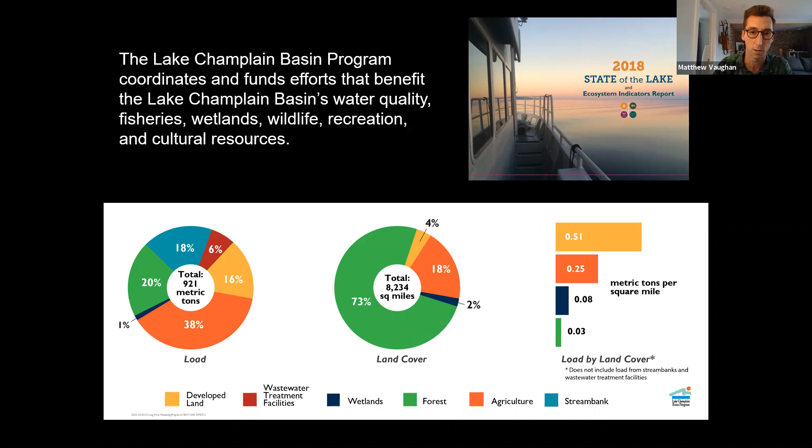I also just wanted to say a few things about how we work. We have a document called Opportunities for Action, which is our management plan, and it's kind of an adaptive management model. This was revised in 2017 and signed by environmental leaders from the 3 jurisdictions we work with. And it identifies strategies like researching ways to improve BMP performance, providing technical assistance for farmers, optimizing fertilizer applications to reduce nutrient load through research and direct farmer support, helping farmers meet clean water regulations through cost-sharing programs, and supporting sustainable ag practices that address these water quality concerns, and also to support phosphorus removal from tile drains and ag ditches. And we'll be talking a lot about that as I go forward in the presentation.

So all of the work you're seeing goes through our active volunteer committees. The Technical Advisory Committee is a group of 25 or so scientists that get together once a month and talk about these issues and help direct the research and implementation of the Lake Champlain Basin Program. And on a higher level, we have a Lake Champlain Steering Committee that awards our grants and helps us identify which partners we're going to work with and what we're going to be focusing on. So again, for the talk today, I'm going to highlight some of our recent work and ongoing work and try to highlight the most important takeaways for you to leave with.

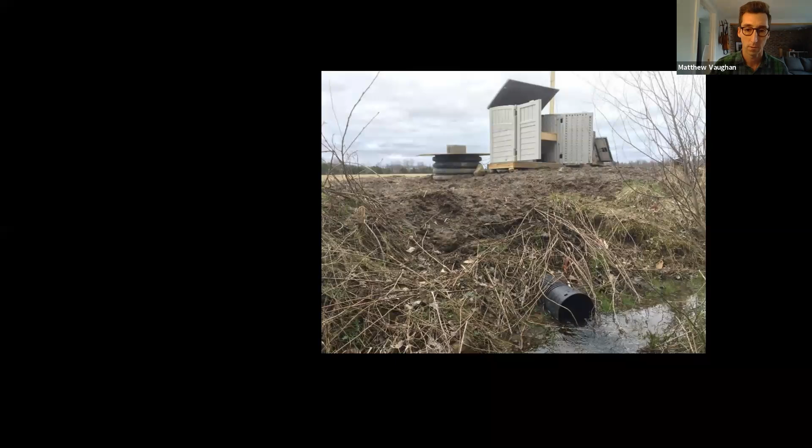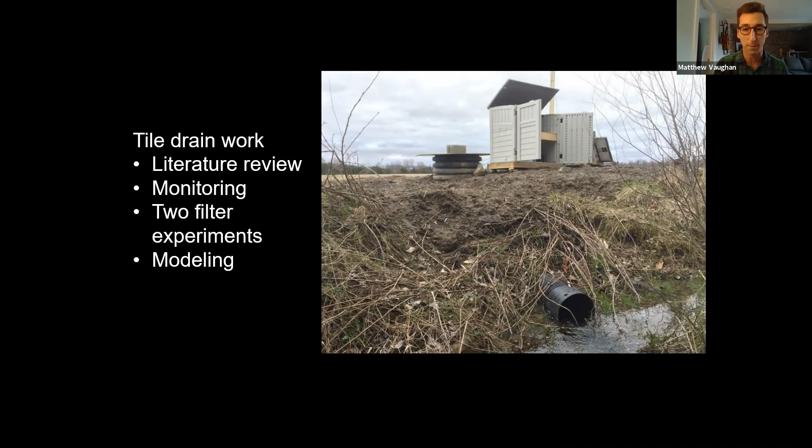So for our work, we've kind of been attacking this from all sides here. We started with a literature review, and then we began a few different monitoring campaigns to see what is actually coming out of these tiles, and that work is ongoing. We also funded 2 filter experiments to see if we can remove phosphorus at the end of these tiles. And we've also funded some modeling to see whether we can identify some best practices to, again, minimize the amount of phosphorus loss from fields through tile drains.

So I'm going to start with the literature review, which is always a good place to start to see what else is out there. And it turns out a lot of people have studied tile drains all over the country and in many places in the world. This work was done by Stone Environmental, and Julie Moore led this project just before she became the Secretary of Vermont ANR. So they found 166 references, almost all of them peer-reviewed, and they came up with some really important takeaways for the hydrology and phosphorus concentrations and loads.

So just some of these takeaways: for the hydrology changes with tile drains, they found that the total annual water output often increased by a factor of about 2. So we're seeing more water off the field and sooner than a field that's not tile drained, which is not a surprise. It's kind of the entire point of tiles, to get water off the field. We saw a reduction in surface runoff. Again, that's the point, not a surprise. Lower water tables, that's the benefit. That's why farmers are doing this.

Eliminated saturated areas, of course, and it provided more capacity for infiltration during rain events. And we've learned that most water, about 50 to 90%, is delivered through tile drain flow. And that can contribute a majority of stream flow in some smaller or headwater watersheds. So this is a really important component of the load of water and nutrients to especially these smaller watersheds if you have a lot of tile drainage.

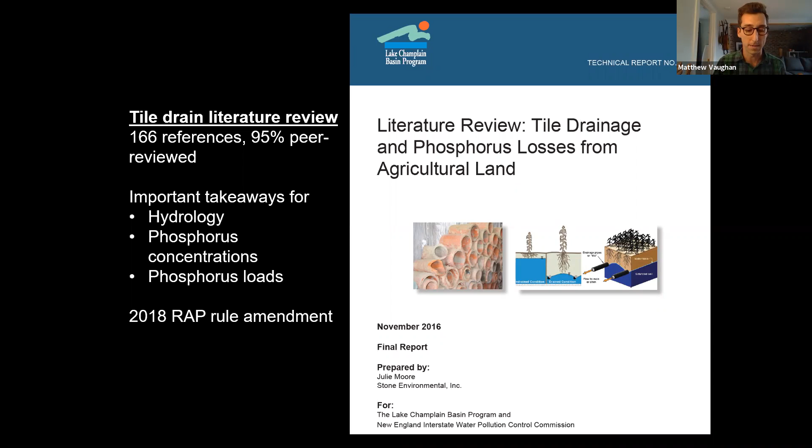So once we had all of those findings of work from other people, we took the next step to actually monitor tile drains in the Lake Champlain Basin. Anyone who works with farmers knows that it's hard to convince people who work with the land that anything is applicable unless it's studied here, which is for a good reason. We want to see what's going on with our watershed right here in the Lake Champlain Basin.

So we did that. We monitored 12 sites in Jewett Brook watershed for the first year of this. And then the second phase, we reduced that to 5 in Jewett Brook and then added some in Addison and Rutland counties. And this was again in partnership with Stone Environmental.

The way they designed these experiments was to intercept the tile. They dug a big hole, intercepted the tile and put in this type of magnetic flow meter here to measure the tile discharge moving through the pipe. And then they had auto samplers take a consistent amount of sample volume that was tied to the flow itself. So in that way, they could come up with a flow-weighted mean concentration that was mixed into a large carboy, and we could get a really accurate measurement of the phosphorus load over time.

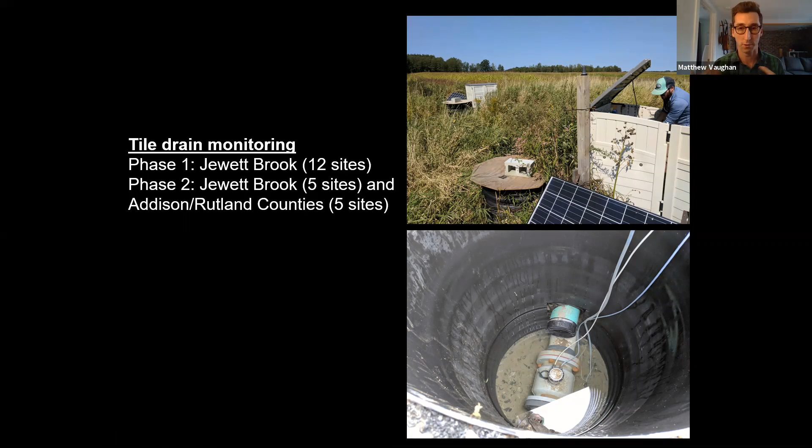And we also looked at total phosphorus, total dissolved phosphorus, total nitrogen, and total suspended solids, and of course, water flux itself. So there are a lot of important takeaways from this phase 1, again, focused on Jewett Brook. Because we only had 12 sites, it was kind of a low sample size to make statistically significant conclusions about what type of site might have yielded certain results. But we did see some interesting patterns that we're able to report on.

First of all, we saw that phosphorus concentrations and areal loads, so load per area, were higher in row crop fields compared to hay fields. That was a big takeaway from the study. And not surprisingly, total phosphorus and total dissolved phosphorus concentrations were higher from fields that had received manure compared to those that didn't. Again, not a big surprise there.

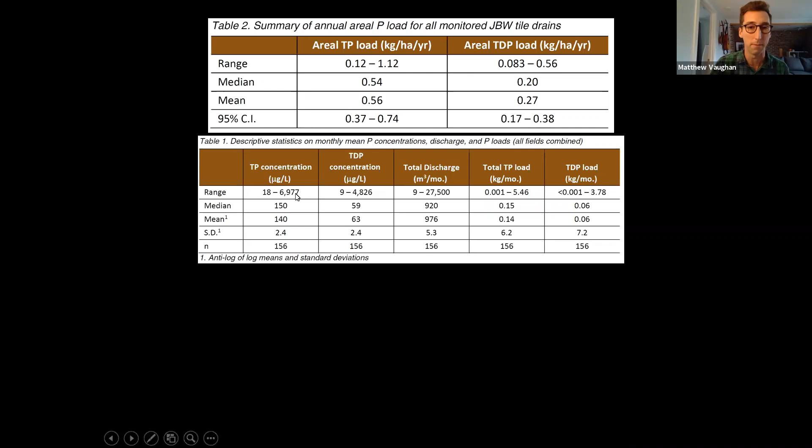And again, maybe not a surprise, when manure application coincided with wet weather, especially, we saw very high phosphorus concentrations. You can see some of those reflected here. 6.9 milligrams per liter is exceptionally high for phosphorus concentration.

So beyond those, some important takeaways I want to discuss. Although annual tile discharge, the amount of water, was positively correlated with field size, phosphorus concentrations did not vary significantly with field size or discharge. So thinking back to what we saw in the literature review, in most other studies, that was a relationship that folks saw. Here in the basin, we did not see that.

And phosphorus concentrations and load did not seem to vary with soil characteristics or with the presence of cover crops on corn, which is a bit of a surprise, but again, low sample size. Those types of things are hard to see with just 12 sites. Similar to other areas, we did not see any obvious seasonal patterns for the proportion of total phosphorus that was made up with dissolved versus particulate forms.

And the flows out of these tiles range from 0 when they were dry to over 3,000 liters per minute, which is a pretty incredible flow at the end of a pipe.

The loads to Jewett Brook could be estimated just by taking the loads from the fields that we were monitoring and extrapolating that to the entire watershed and then looking at what is measured at the long-term monitoring site at the mouth of Jewett Brook to try to get an idea of how much of the total phosphorus making its way to St. Albans Bay through Jewett Brook is coming from the end of a pipe in tile drain fields.

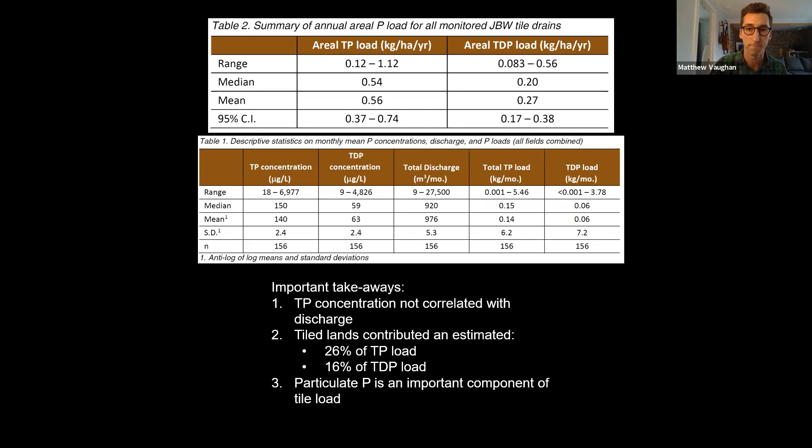So Matt, there is a question from Karen with DEC. She was asking, are the Jewett watershed soils mostly clay? I'd have to go back and look to remember how many of them are clay. I think only a few of them are predominantly clay, and that's one of the reasons that in phase 2 of this project, we wanted to move to Addison County, where there was a higher prevalence of clay soils, to get a better representation of that type of field. Does that answer the question?

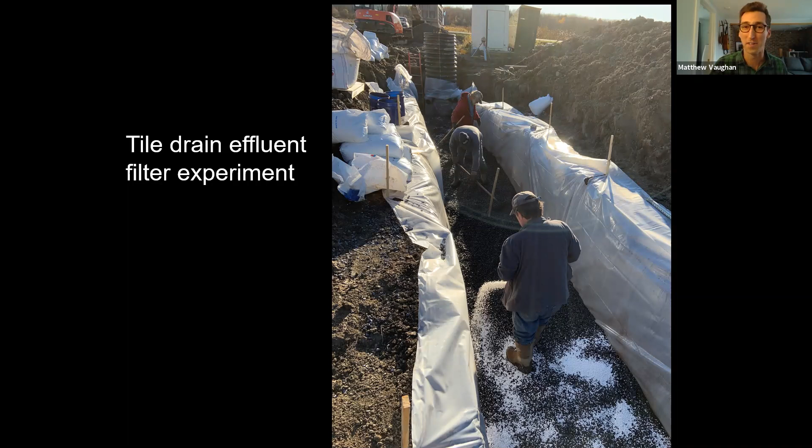I'll take that as a yes. I can only see you, Allie. So, all right. So I apologize for the background noise. I have a toddler and a 13-month-old in a small house, but we'll do our best here.

So the next thing I'll talk about is an experiment to actually filter out or chemically absorb phosphorus at the end of a tile drain. And the analogy that we've been using is, you can think about this as a technology like a septic system, in that it's something that's on site. We could develop a best practice for it if it's cheap and accessible and it's not a complex design. This is something that could be implemented throughout the basin and throughout the region as a way to capture phosphorus before it enters our receiving water bodies. So what you're seeing here is the installation of a tile filter. Again, this is in partnership with Stone Environmental.

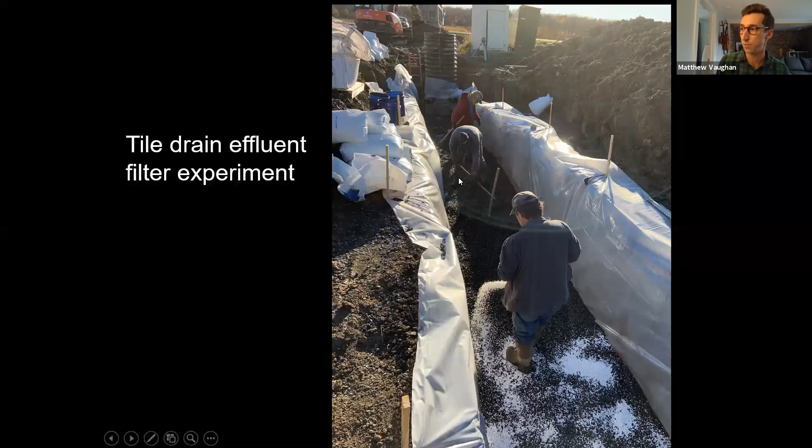And the design here, actually, I'll start by talking about a benchtop experiment. So we looked at three different mixes of media to determine what would go into the actual installation. One was just half-inch pea gravel, which is kind of a control. We had pea gravel with 5% activated alumina, which is a substrate with a lot of surface area and good absorptive capacity. And then the third one was crushed St. George Black, which is a shale material that is pretty widely available in the region.

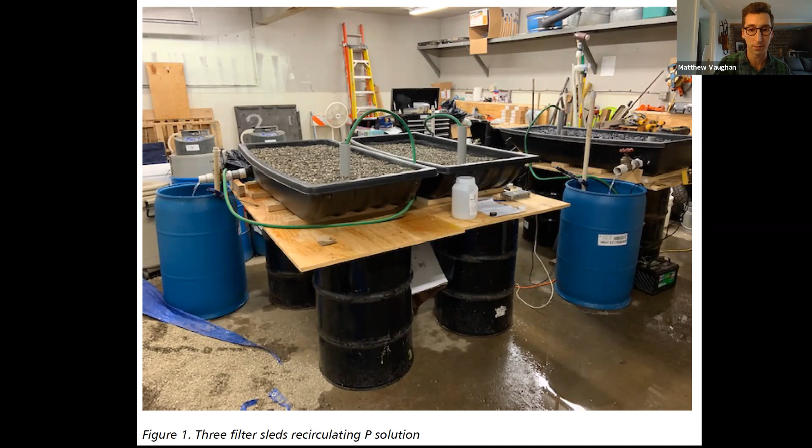And the way this worked was they had water spiked with phosphorus, and they continuously added phosphorus to maintain a constant concentration. So they're able to measure what was added, and they could conclude that whatever was added to maintain a concentration was absorbed by the media. So that's the thinking with this experiment, to see how well these media would perform if installed into a field. And so here you see just the pea gravel control, the activated alumina mix, and then the St. George Black in blue.

And so you're seeing the addition. So this is really what was absorbed by the media. And the activated alumina and the St. George Black really performed very well. The pea gravel absorbed a bit and then kind of petered off toward the end of the experiment. But it's not really a surprise that St. George Black and this activated alumina absorb phosphorus. We knew that already. It's really kind of a balance or a trade-off of hydraulic conductivity and filter clogging. You want to avoid clogging the filter along with this absorptive capacity.

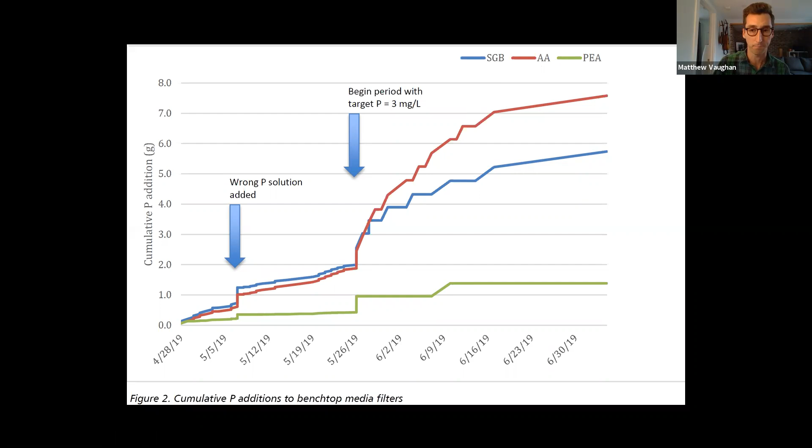So this gave us some confidence that if we use activated alumina and/or St. George Black, then it would probably be a good filter, at least to start with, for this experiment. And here's a schematic of these filters, and this is not exactly how it would look if it were implemented on a large scale, or if this became a BMP. This is a setup to study the filter. So you have inflow from tile going here.

Allie, you can see my mouse, correct?

Okay, thank you. You have inflow from the tile here, and then you have a monitoring well here where we can take water quality and quantity samples. And then it splits into the two filters. And these each are 5 feet wide, 65 feet long, with 2 feet of media backfilled with native soil. They're lined with 10 mil thick heavy duty plastic. And the pipes are 6-inch perforated.

The field it's draining is 94 acres, and its design flow is 6 liters per second per filter for a total of 12 liters per second, which is about the median of what we saw for this tile during the first phase of monitoring. And for the experiment, we went with 2 different filter media. One was St. George Black, and the other was a mixture of St. George Black and that activated alumina that we talked about. And so the residence time through here is designed at about 50 minutes.

And you can see these arrows. The water will be split into these two lines of pipes, and then slowly percolate across to the outflow, which is on the other side here, and then into the outflow sampling well for both filters. So we have the inflow monitoring here and outflow monitoring here on the 2 filters. And we had some delays with this project for several reasons, but we're getting some good data from this, and we're hoping to have some results mid next field season, I think it is.

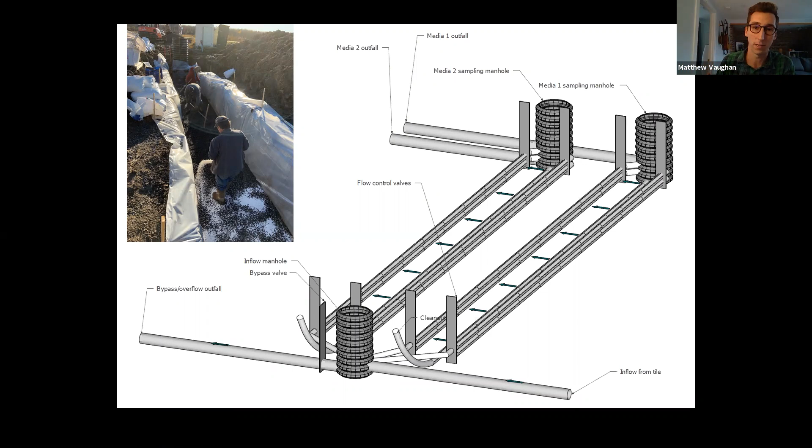All right, good to move on, Allie? Okay, thanks. We have a second tile drain removal experiment. This one is also using St. George Black shale, not a mix, just the shale alone. This one's a bit different. It's designed specifically for base flow and tile drains.

And this one, it's a neat, simple design where you have a ditch here and a tile drain going into a well with a pump. And that pump will bring it up into this cell that you see here, and it'll kind of upflow through that cell and then out the top. So the contact time is moving up through that filter system. And again, it's taking samples in a flow-based way, so we can get some good load estimates from this experiment.

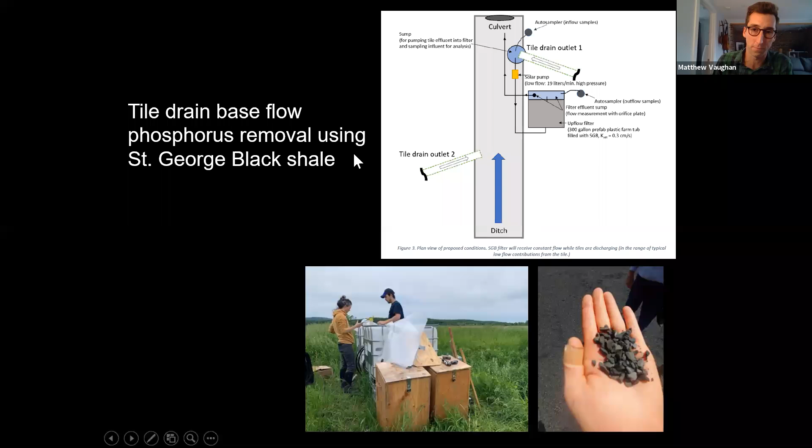And this one also has had some delays for multiple reasons, and we have about half of a field season under our belts here, and then we're going to probably continue this into the spring, because even though it's designed for base flow, we've been having a hard time getting the flow to sample in the field that was chosen for this site. So I'm sure you're all familiar with field work woes, and that's not uncommon for this type of work. But I think we're going to get some really good results from this one. We've already seen some reductions in total dissolved phosphorus from this style of filter.

Okay, and the next, I think this is the last tile drain project I'll talk about. So we did the lit review, we've done the field studies, we've done the filter experiments. We also funded a study to model field management practices for tile drain fields. A group called Newtrient, which has an interest in promoting sustainable practices for dairy farmers, and the modeling team at Stone Environmental worked on this together to calibrate an APEX model, which stands for, I always struggle with this one, Agricultural Policy Environmental Extender, I think it is, which is a field-based model that can simulate hydrology, nutrients, pesticides, and help you manage a farm on the farm scale.

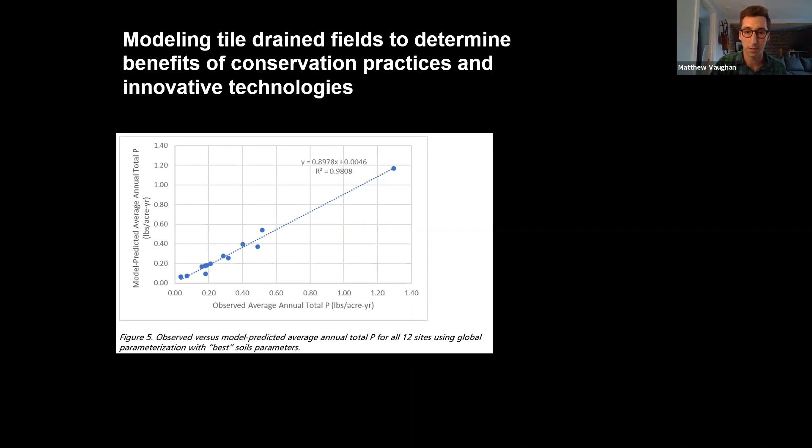So they were looking at BMPs like manure injection, no-till, cover crop, a combination of cover crop and no-till, and then some more innovative technologies like dissolved air flotation, which was new to me when we started this project. It's a process where you use chemical inputs to aggregate small colloidal suspended solids into larger flocs for separation and dewatering, and then you can put those in a stackable pile and export them or move them around the farm for a more targeted application.

There's also evaporation, which is a bit more simple. It's where you separate manure into solid and water components that are heated, sterilized, and distilled. And then you get a coarse fiber product, a dry solid manure product, liquid ammonia, and then relatively clean water from that. And again, the idea is you're separating out these components and you can have a more targeted approach in time and space, or even export these materials and sell them in theory.

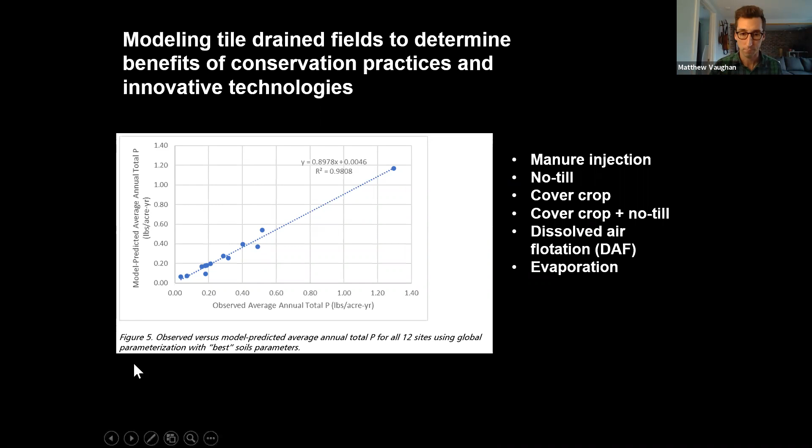So what I'm showing here is the calibration of the APEX model with the tile drain monitoring data that we collected. We actually use that data in this model to then try to simulate what benefits we get with our best management practices. So this included several of our tiles at Jewett Brook and some tile drain monitoring done in New York at the Miner Institute. So this was a basin-wide study. So I'll just jump right to the fun part, the results.

So these are the more conventional best management practices, and you're seeing different components of the phosphorus load, tile phosphorus, soluble surface, and sediment surface, and then the total phosphorus, in this case, the reduction in losses from these different practices. So in general, the combination of cover crop, no-till wins out here with the total reduction, and we're looking at optimal phosphorus scenarios, and we're going to look at higher phosphorus soils in the next slide. But we're looking at a bit over 30% reductions with this combination in tile drained fields. And manure injection, surprisingly, you don't get any reduction in the tile drain fields there.

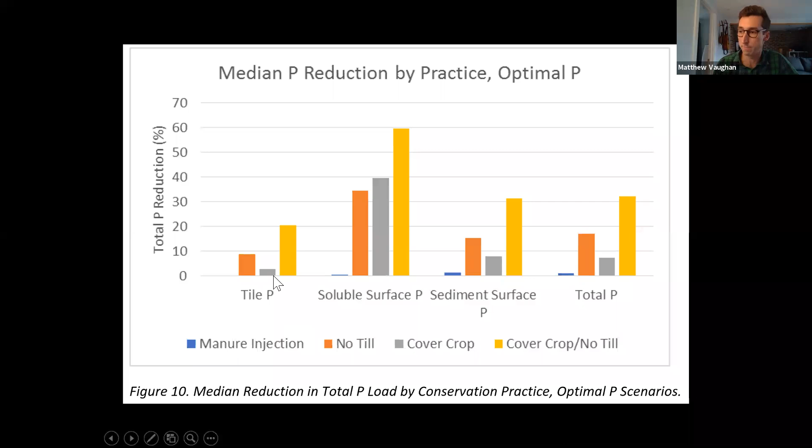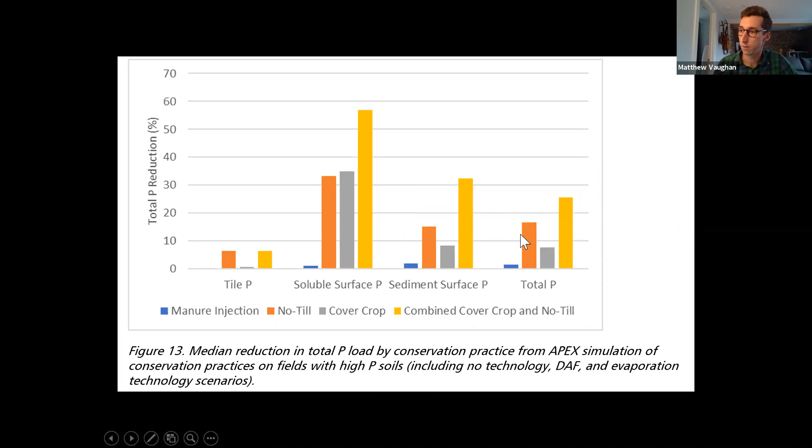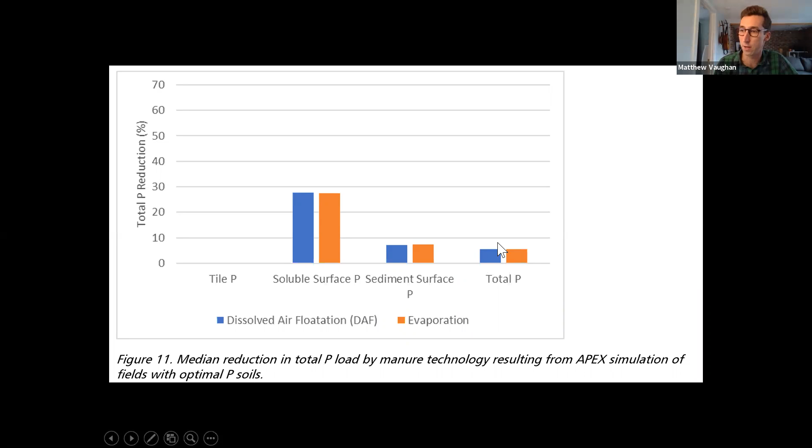And then this is the same thing, but for high P soils. So we're starting from a higher point, and you see a bit less than 30% reduction. It's a bit harder to drop with these best management practices with tile drain fields. And then we can look at the more innovative manure management practices with the dissolved air flotation and evaporation. We see with optimal P soils about a 5% reduction in the total phosphorus loss, according to the model simulations. And when you have high P soils, that's when you really start to see the benefits of these more innovative technologies, and about 15% reduction with these two for total phosphorus reduction there.

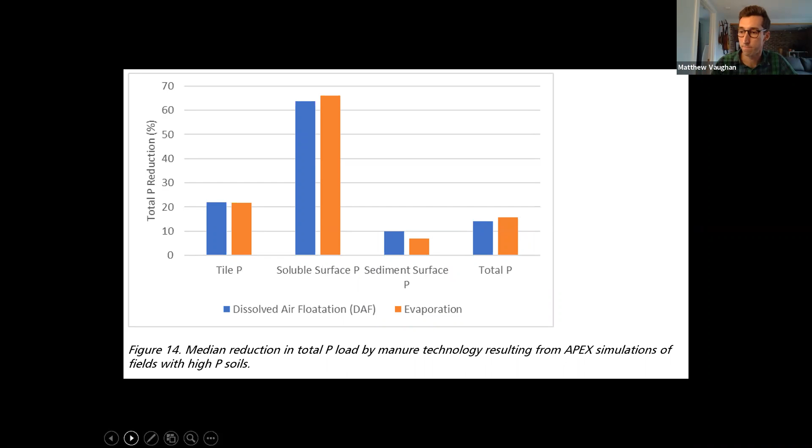Okay, if there aren't questions on that one, just check time here. Okay. We're 10 after, Alex. Should I try to breeze through to the end, or what do you think? Maybe about 5 more minutes, or? I'd say keep going. Yeah.

Okay, cool. All right. So next, many of you may have heard of FarmPREP, which stands for Farm P Reduction Planner. And this is a really neat online tool that the Basin program funded. This is, again, with the modeling team at Stone Environmental.

And so this is a tool that helps farm management planners quantify reductions in farm scale P losses, and also on a bigger scale, meet sub-watershed TMDL goals through field level practices. Because the TMDL lays out what each sub-watershed needs to achieve, but doesn't say how a farm or what a farmer needs to do to get there to do their part.

So this is an optimization tool where a planner can go in, draw their fields right on an online tool, and then the tool will in the background grab all the publicly available data about the soils, the slope, and everything else that it might have available. The farmer can then enter in field management practices that are the baseline conditions, and the tool will run thousands of scenarios to identify the best combinations of best management practices that will achieve maximum phosphorus reductions, and then ones that might not be the maximum reductions, but might be more palatable to a farmer who actually has to do the work.

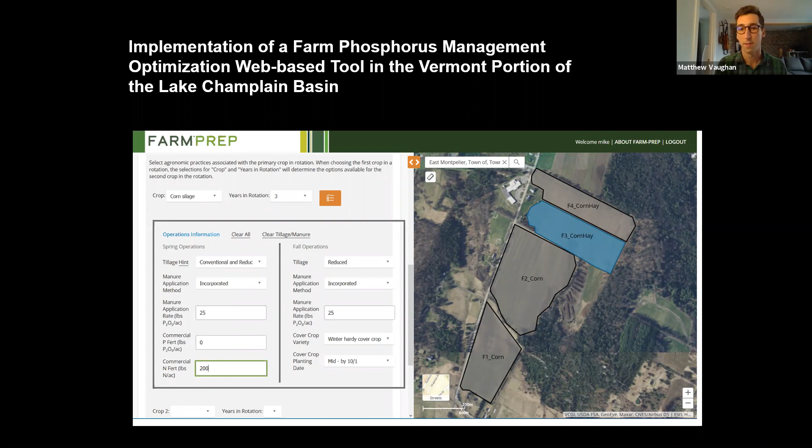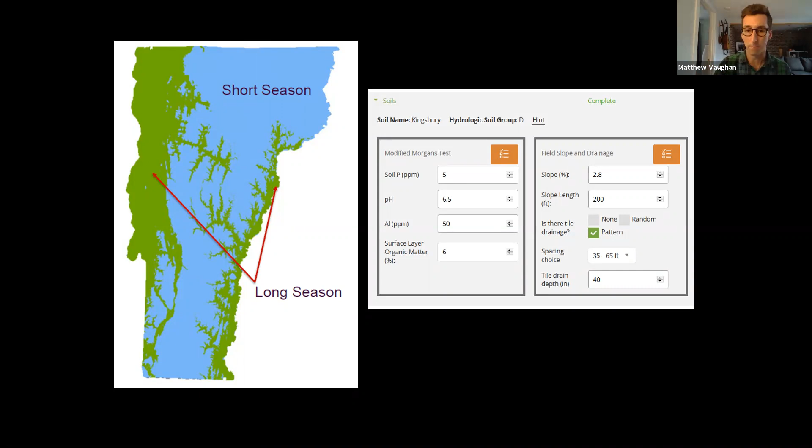So the Stone team added many more crop rotations and crop types. They added more spring and fall tillage combinations. They added a second growing season, a short season and a long season for Vermont. They added the ability to overwrite the information that it's automatically grabbing. So if you have better data on your soil than what it's grabbing from the SSURGO database, you can just enter that right in. And then you can also add tile drainage information, which will affect how the model handles the phosphorus reductions based on our understanding of how tile drains work.

A few more improvements. Farmers and their managers can exclude or prioritize best management practices that they are really interested in trying or not at all interested in trying. This way it won't give you back a bunch of results that you have no interest in implementing, which makes a lot of sense practically. And originally, like I said, you can draw your fields in this tool, but the improvement allows you to upload a shapefile if you happen to have GIS information about your farm. You can just upload that right into the tool.

So this is currently being used. It's available online, and it's hosted through Basin Program support through the end of 2022 at this point. And I think it's going to continue well beyond that, because I think folks are finding it very useful to actually come up with solutions that people can use on their farms. So I think I have a few more studies.

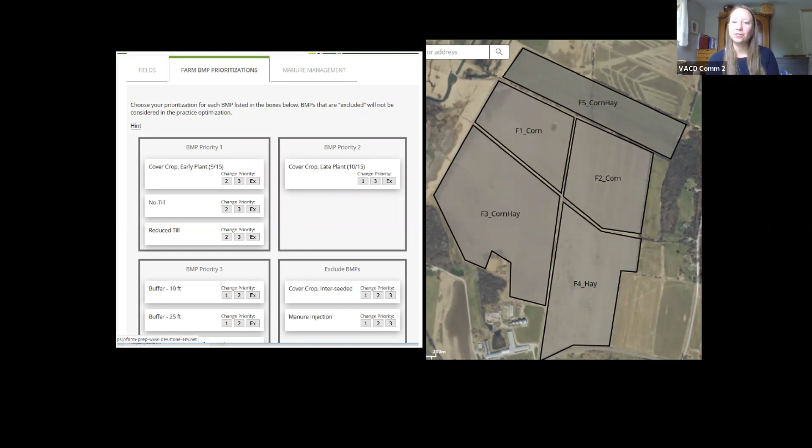Did you have something, Allie? Yeah, there's a question from Katie with DEC. Do you have a file or report outlining the phosphorus reduction efficiencies applied for the various BMPs? Yes, that will all be in the final report for this project, which is available on our website. And I think it's in the documentation of the tool also, if you go to the Farm PREP tool website. And those all come from the Vermont Agency of Ag water quality expert panel that got together and determined the reduction efficiencies for all BMPs in Vermont using all the available literature and monitoring that we've done in the area to the best of our ability. So it's a good question.

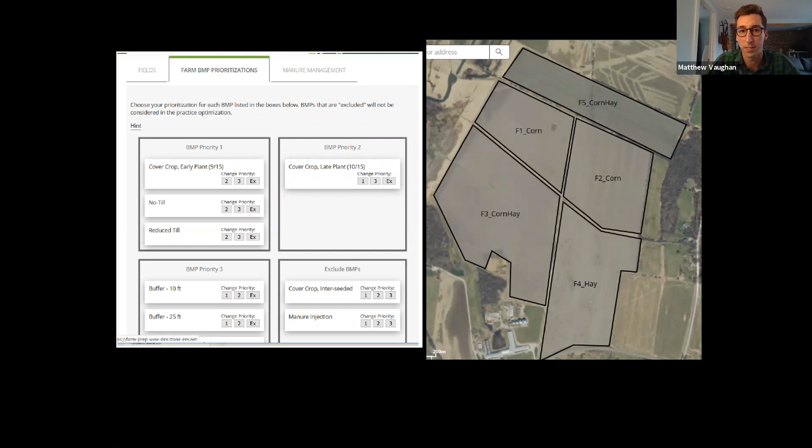Okay, I'll just kind of breeze through a few more here. This is an ongoing project to look at whole farm nutrient management. This is with UVM Extension, and Heather Darby's leading this one. It's a really important idea, I think. Traditional nutrient management plans really, I think, look at what's applied on the field and what's required for the soil for plant uptake. This whole farm nutrient balance idea dives a lot deeper at the whole farm, what's coming in to the bubble of the farm and what's going out in every different direction.

So it's going to look at animal feed phosphorus levels, fecal phosphorus for the animals, herd health, and what's required for the animals, soil health, soil test nutrient levels, financial statements to try and save the farmer money, so they don't have to bring in more nutrients than they need. That will then make their way to the waterways. And then milk quality and quantity for dairy farms. So the results will be used to promote adoption of this idea potentially throughout the entire basin.

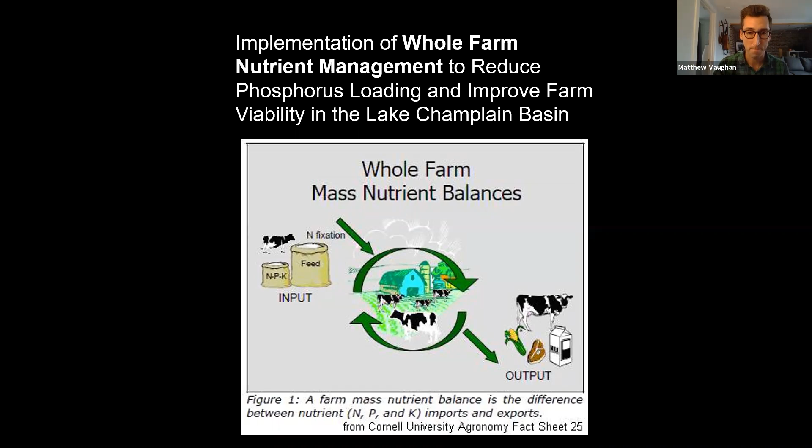And I have more to talk about, Elliot. I don't want to step on the Q&A period. Should I keep going? All right, sounds good. I think 5 more minutes would be good. Okay, cool.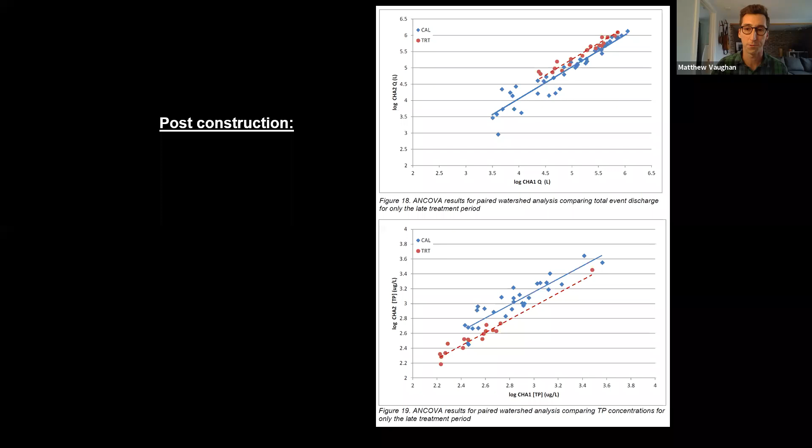And I'm just going to skip to the results here. So again, there was a calibration period where there was control and no treatment, and then the treatment period. And there were a lot of limitations to the study because of several confounding factors and difficulties, but I'm going to go with the results first, and then I'll mention those. So we monitored 51 runoff events through the control period and 41 post the construction of the grassed waterway.

And one of the things we found was that event flow was significantly higher with the grassed waterway. So we're getting more water, probably because things could run off more easily without the vegetation, the crops there slowing them down a bit. So the good news is phosphorus, nitrogen, and total suspended solids concentrations were lower in the treatment period following grassed waterway construction. And when we eliminated that initial treatment period when it was installed but not really grown in, that difference was even stronger.

However, because the event flow was higher, that somewhat canceled out our effect of the concentrations being lower, and phosphorus loads had no change, even though the concentrations were lower, and nitrogen loads were actually even higher than before the construction. Total suspended solid loads, however, were lower, and that's one of the main goals of a grassed waterway, is to reduce erosion. So we did achieve that goal of the grassed waterway.

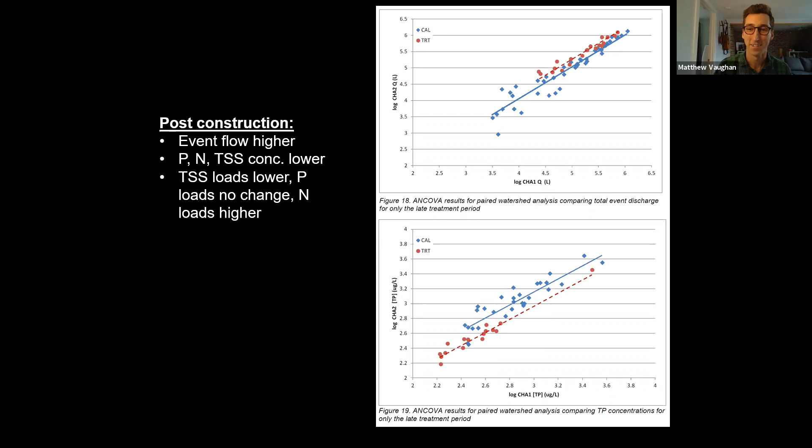So this study, like I said, was really complicated. There were ownership changes to the farm. There was no crop planted on either study watershed in 2018. There was no tillage or manure application during the final field season like there were supposed to be. And these probably impacted our ability to see the benefits of a grassed waterway, if there are stronger benefits than what we observed. So this definitely was a learning process for us and showed us that paired watershed studies are really hard to pull off. So keep that in mind if you're ever thinking about doing one. Confounding factors, yes.

Okay. So I just wanted to quickly mention some of the other work to implement these and other practices that the Basin program has supported recently. So we've supported innovative roller crimper technology for cover crop termination. We've supported targeted implementation for critical source areas that were identified in the Missisquoi Bay watershed. You all are probably familiar with the multi-partner practice tracking database that's geospatially explicit and helps people work together. And that was a long process getting off the ground, but I think it's a helpful tool at this point.

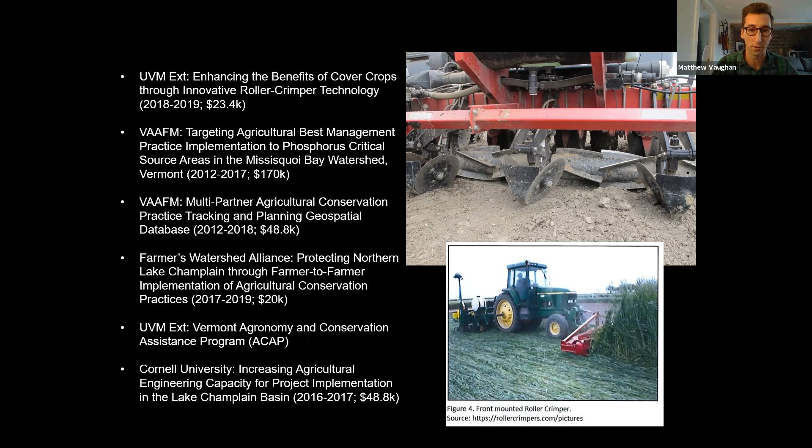We've worked with the Farmers Watershed Alliance to implement conservation practices in their area. We funded several years of the ACAP program through UVM Extension, and we supported a pretty neat training program for engineering capacity for dairy farms run through Cornell University Extension. We also have several videos on our website that are meant to communicate some of these innovative practices to farmers and to other people who might be interested in what farmers are doing to improve water quality. These are all available under Clean Water Commitment on our website. And I encourage you to check these videos out if you have a few minutes.

There's other really neat projects going on that you may be interested in. They're not specifically agricultural, but they do tie in because of floodplain and wetland protection and conservation. So we have a study looking at the potential for our floodplains throughout the basin to be restored. And if we were to restore them, how much phosphorus reduction would we get? And there's a really cool field study going on to really try and quantify that and put a finer point on it.

Similarly for wetlands, if we can restore wetlands, how much phosphorus reduction benefit would we get? And this is really looking at soil incubations and how phosphorus is moving and transforming through the system. There's a really cool modeling component of this project.

And finally, you may have heard about the treatment train idea on Jewett Brook. And this would be to actually divert some water from Jewett Brook and treat it outside of the stream to try to remove physically and/or chemically phosphorus before it enters St. Albans Bay. So currently we're in the technical feasibility phase where we're looking at modeling some of these ideas, seeing if it would be technically feasible to do this work.